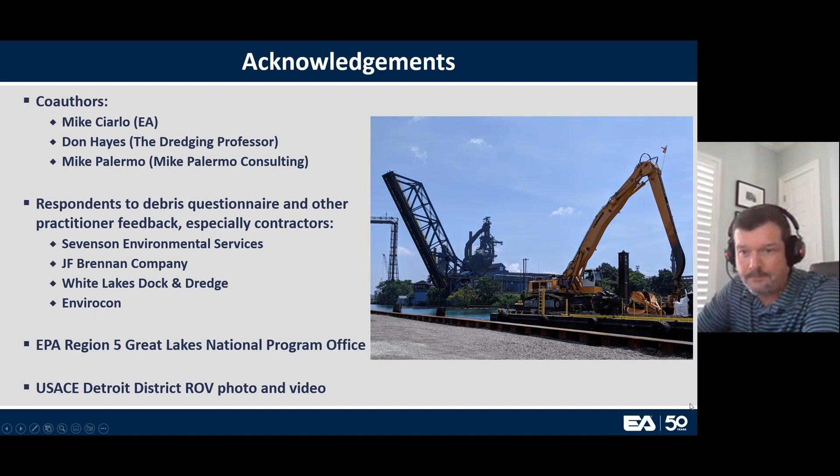So why is debris an important topic for environmental dredging or sediment remediation in general? We'll see in the next slide how important sediment disturbances are in the process of remediation, environmental dredging in particular, and debris can be an impact to that. Debris can also affect the operation side of dredging, resulting in additional project costs and extended construction schedule. It can be an important factor in the achievement of remedial action objectives in some cases, particularly if there are significant quantities of debris, and we'll speak to that in the upcoming slide. This is not just a consideration for dredging, it also impacts other remedial alternatives such as subaqueous capping. Next slide please.

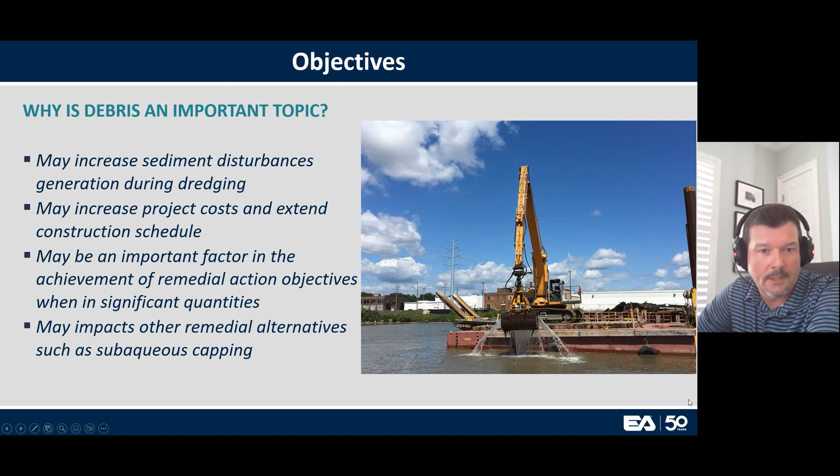Within the WEDA paper, we started by trying to compile and assemble all the information in the context of what do we know about debris for environmental dredging and what do we not know. That's in the context of published literature and guidance such as design guidance that both project planners and contractors who implement those projects have access to. One of the things we quickly realized is that we needed to step back and start almost from scratch, thinking about trying to find a common basis for stakeholders, the regulatory community, planners, and contractors to use the same terminology and have that same foundation in understanding of debris. A good place to start was a definition.

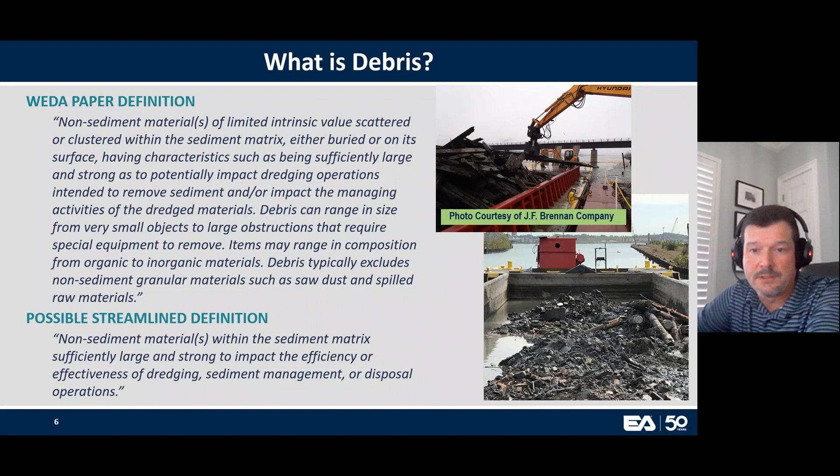So we proposed a definition in the WEDA paper. This one is very detailed, and I'll just present here the streamlined version, which is: debris is non-sediment materials within the sediment matrix sufficiently large and strong to impact the efficiency or effectiveness of dredging, sediment management, or disposal operations. Next slide please.

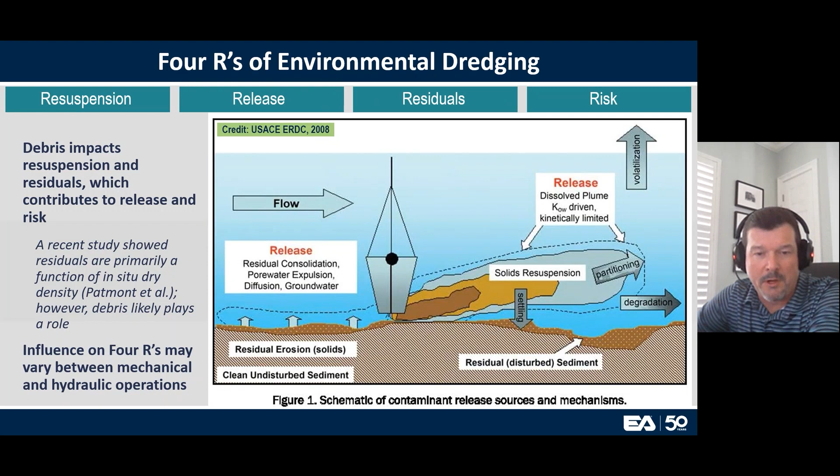And that ultimately combines and contributes to the environmental risk, the other R. But we don't see debris in this depiction, and we wanted to examine that more closely. Next slide, please.

So within the paper, we proposed a definition, as we saw. We tried to develop some planning tools to help with understanding debris, whether it's thinking about the feasibility study stage of a project where you're weighing one alternative versus another, or the actual design of the project.

We described some of the considerations that debris will have on the 4 R's for dredging that we just covered. Talked about debris impacts and some of the characteristics of debris that are important to try to better understand to plan the project.

We also provided, and in part from the input from contractors, a range of construction operations that can be employed for debris for both mechanical and hydraulic operations. Next slide, please.

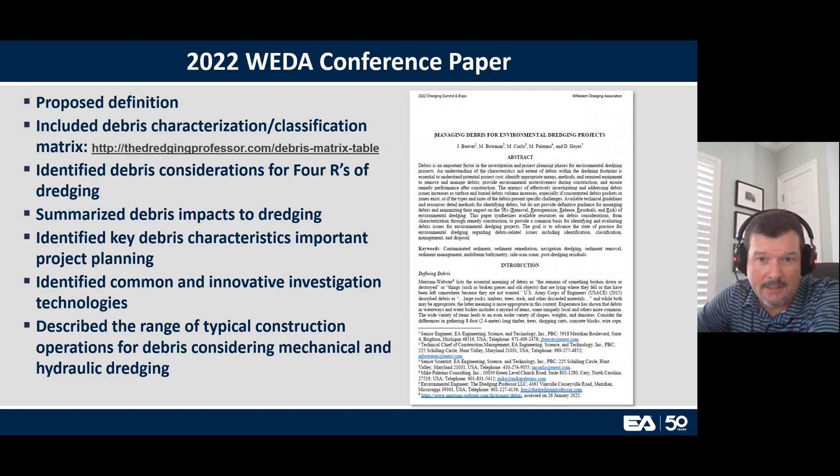So we're not the first to think about debris. Debris is covered in the literature and in guidance that is out there. It's just covered at a high level. That guidance does acknowledge the fact that debris is an important factor for both the environmental considerations for a project as well as the operational factors.

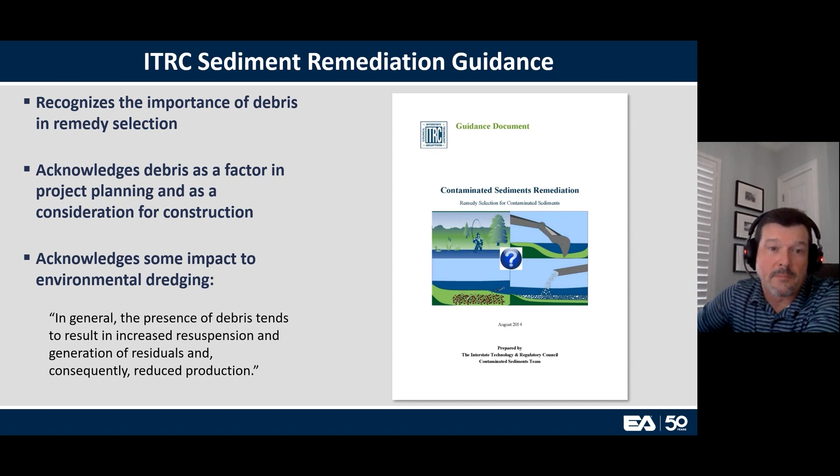And then as that bucket tries to dislodge and remove the sediment, it will pick up debris along the way. In doing so, that debris can contribute to the creation of voids, for example, that residuals can find their way within. It will obviously create additional disturbances of the sediment that contributes to the resuspension process, et cetera. And then as the debris is being lifted through the water column, sediment that's adhered to the debris itself in some cases, and then if the bucket is ajar and held open by a large piece of debris, then you can have losses entirely through the water column. That's something we need to think about.

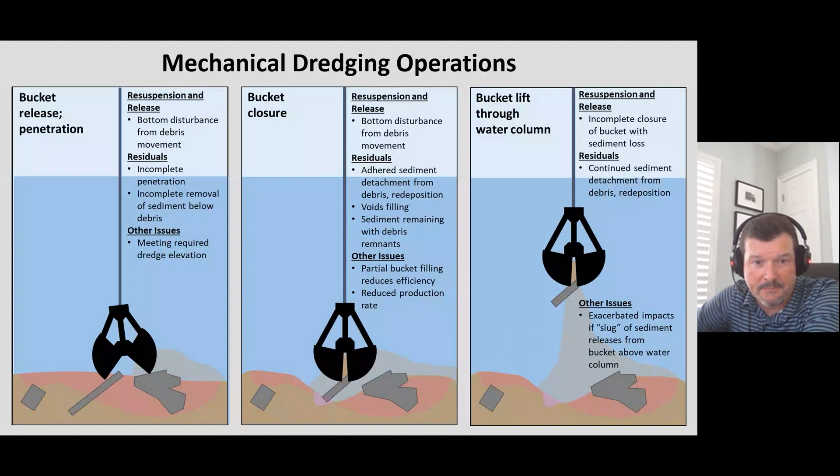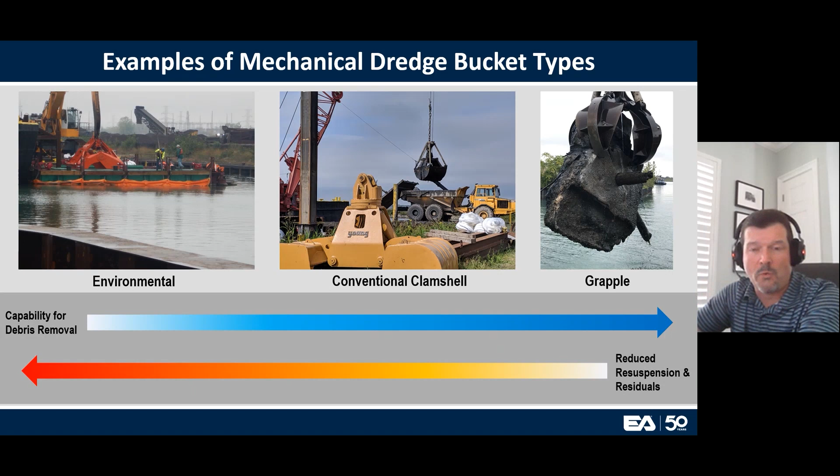And then we think also in terms of hydraulic dredging operations, which has some of the similar considerations for both environmental and operational impacts. In this case, though, the hydraulic dredge is essentially like a vacuum below water. There is typically a cutter that's dislodging sediment. In proximity to the cutter, below the ladder, is an intake to the pump and the pipeline. That intake is a very finite size, could be 8 inches or slightly larger.

There's only a certain amount of debris that could get through that. In fact, contractors may intentionally try to limit the debris that gets entrained in that process because of downstream processing that needs to take place. This type of operation, the dredge moves side to side, so it may kind of skip over or jump over debris, providing some additional disturbances.

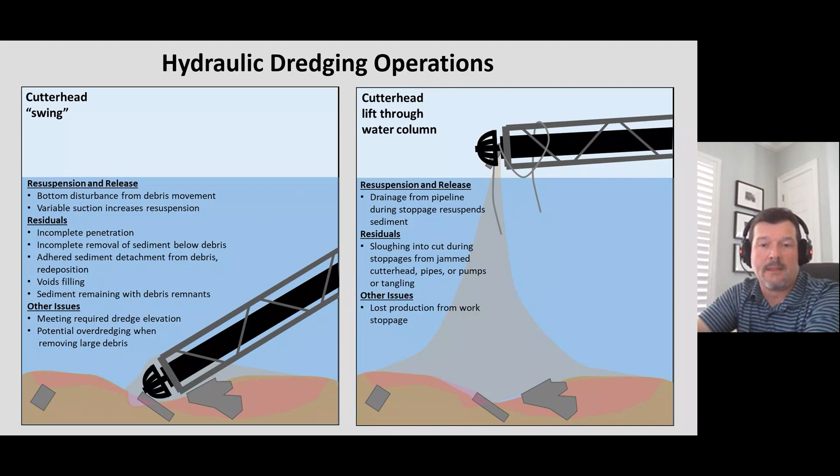Similarly, as with a bucket, these dredges need to come out of the water. So when you have to lift these up for maintenance or dislodging debris, that will also release sediment to the water column.

This is just a table that is in the paper, but it summarizes some of the factors we just went through. In the table, we tried to identify some of the more key considerations from those 4 R's that would be in play during those operations.

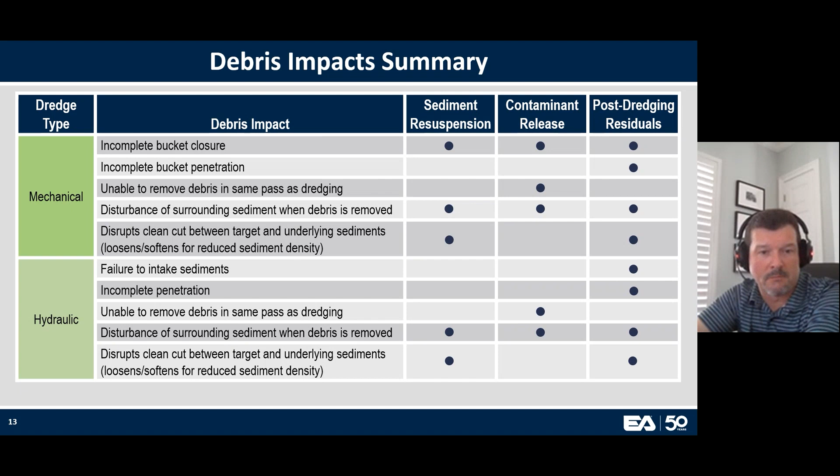We also wanted to think about categorizing our understanding, or the degree of uncertainty we have for a given site in regards to debris — unexpected debris versus expected debris. Unexpected debris would be something you think about for buried debris in the sediment subsurface, within the volume of sediment that has to be removed.

There are limited techniques available to us to really truly understand what buried debris looks like for a site. But our goal is generally to get as much of that unexpected debris into the expected debris category.

That can start with review of the operations for the site history. Even at the feasibility study level, a lot of effort can be put into trying to ascertain what the debris picture might look like for the site, and that can lend itself to improved planning for investigations, which we'll go through in subsequent slides.

We further divided expected debris into these other definitions, showing an increasing understanding of debris. If you anticipate the debris based on site history and anecdotal information, and start to understand the location of that debris, we call that identified debris. Then finally you reach a point where you have characterized the debris, which is the best position you can be in from the project planning phase moving into the construction phase.

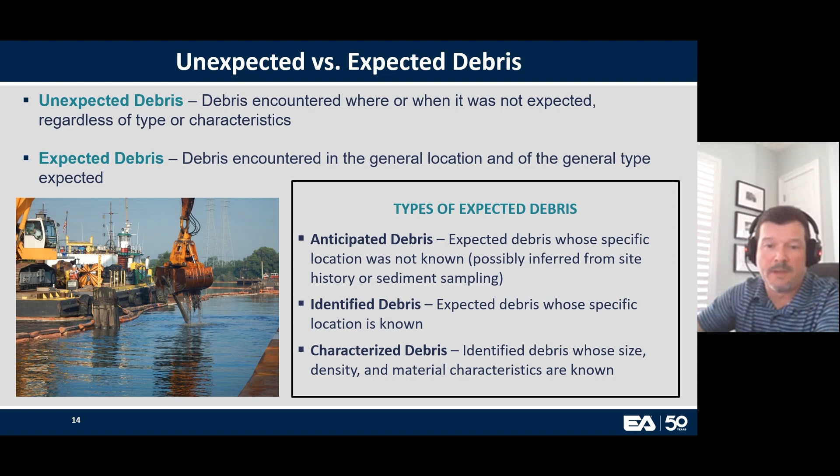So the key parameters we're looking for in a feasibility study or design are these items. We want to understand the types of debris present — if it's wood, metal, concrete — those each have different considerations and implications.

The size of that debris — smaller debris that can be easily contained within an environmental bucket or pass through the intake of a hydraulic dredge may or may not be even important in a sense. It's always important, but larger debris that may drive additional operations, may drive additional handling steps, may require specific disposal considerations, as well as other factors like the distribution of debris.

Is it localized within an area of the site that was active for an aspect of its history, or is it completely distributed throughout the sediment? And ultimately, can we reach a point where we can quantify that debris? As previously covered, the environmental factors are also key.

I wanted to point out that photo, from one of our projects. We were able to identify these cars — I'll show on an upcoming slide — using multi-beam bathymetry. As a result of being able to identify those debris items, we were able to, in the design, plan for a separate removal operation with this grapple.

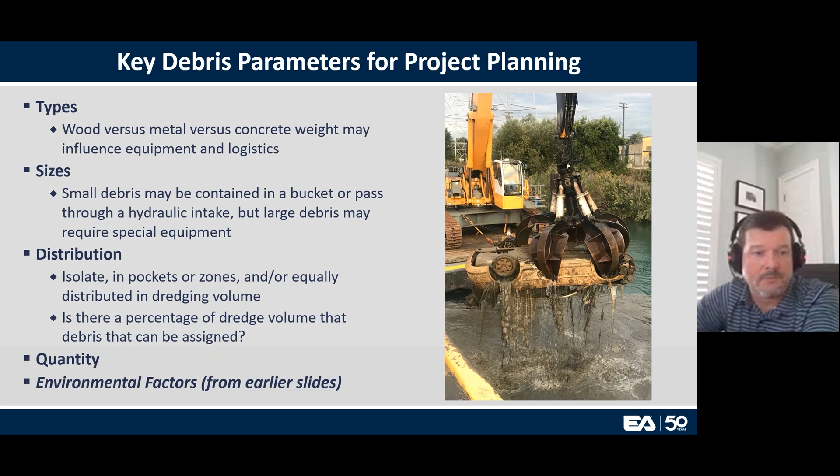If we think about drilling down even further to characterize debris, in the left-hand column there, we identified some parameters that we felt were important for that: unit weight, total weight, the embeddedness of debris, whether it's at the surface or, for example, maybe it's a log that's fully embedded through the entire thickness of removal. There are aspects of these characteristics that can drive problems ultimately, so we wanted to put a relative ranking.

On the embeddedness example, you would expect, for instance, that a log embedded fully through the thickness of removal will create additional resuspension and residuals above and beyond what you would expect for the sediment itself, and so on and so forth in the table.

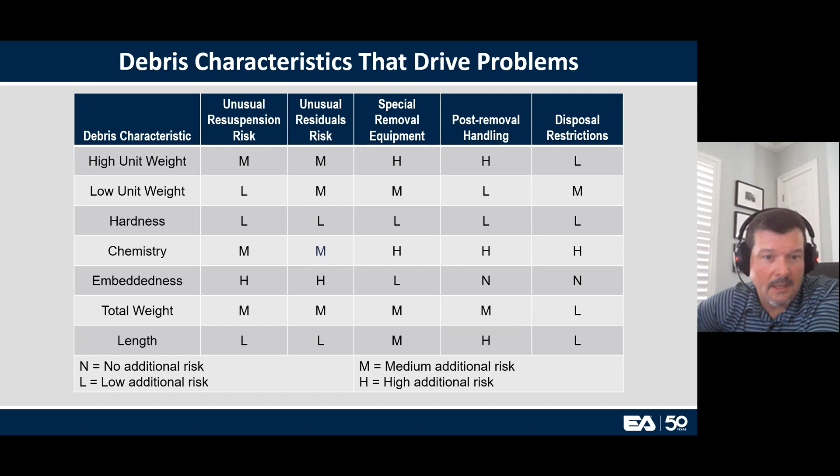This is another tool we developed for the paper. You can't see any of this, and that's okay. What we did is think about every piece of debris we could possibly think of and tried to place context to that. With a bullet, we did a yes/no on whether that particular debris might be important in terms of the debris characteristics that can drive problems, but also in terms of the entirety of the operations process, from dredging, dredge material management, transport and handling of sediment and debris as a combined volume, and ultimately the disposal. This is intended as a planning tool, and we included that in the paper.

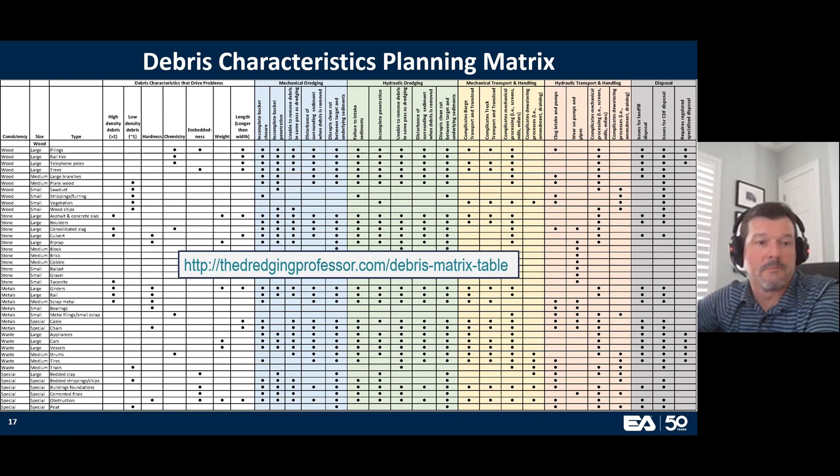Conceptually, one would expect that as our understanding of debris improves and we're able to characterize it and get some indication of the parameters that can drive problems, we can think about the project risks, plan the appropriate requirements, and include that in design specifications for both environmental protections and operational considerations.

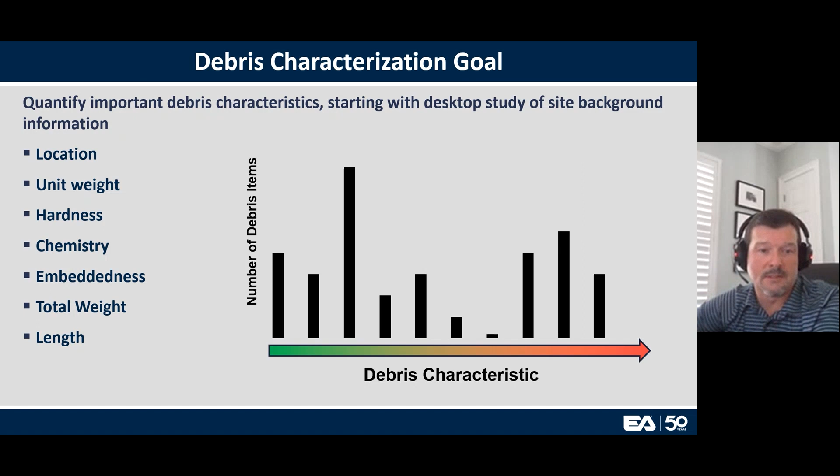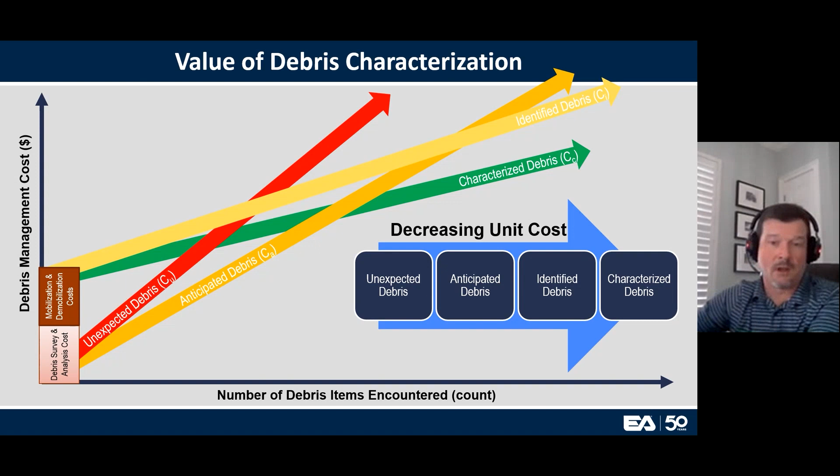Conceptually, as we increase our understanding of the debris, it can affect the outcome for project costs. If we go into a site where we don't have much knowledge of debris, or unexpected debris is significant and can't truly be characterized, one would expect that during construction, when the contractor encounters this difficult unexpected debris, costs would be on a pretty steep trajectory for each debris item encountered - that's the red arrow. But with some upfront investment in investigation activities, you may find yourself on a flatter trajectory where the cost per item is less, because both you and the contractor can account for that in executing the project.

This is an example from the previous slide - we saw the car. On the right-hand side is the data that ultimately led to the conclusion that those cars were there. In this case, it was as simple as multi-beam bathymetry, a data type that's very common for dredging projects and occurs very early in the project phase.

If conditions are right and you can choose between single beam or multi-beam hydrographic survey, a multi-beam that provides higher resolution could give benefits like this, where you're able to see the debris at the surface. Multi-beam bathymetry has been an effective tool for us, along with others listed here - this isn't a comprehensive list of investigation technologies. There's side scan sonar, and for a closer view of debris, technologies like remote operated vehicle, and even diving, which is fairly rare but can be employed. There are also technologies like magnetometer and sub-bottom profiling, but for understanding debris, those are difficult techniques to get good conclusions from, given their limitations.

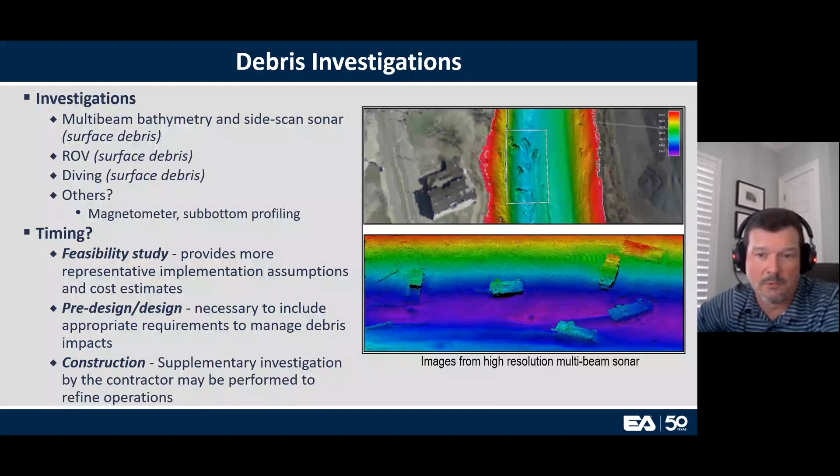This is an example of a side scan sonar mosaic from a project in a lake setting, about 150 to 200 acres. It's tough to see some features, but as you drill down and zoom in, unfortunately you start to see artifacts - those vertical lines are just the limits of the survey transect. But the resolution is so high that you can zoom in and see. In this case, we were looking for wood debris, and we were able to see clusters of debris in the surface texture that helped us understand this particular site better.

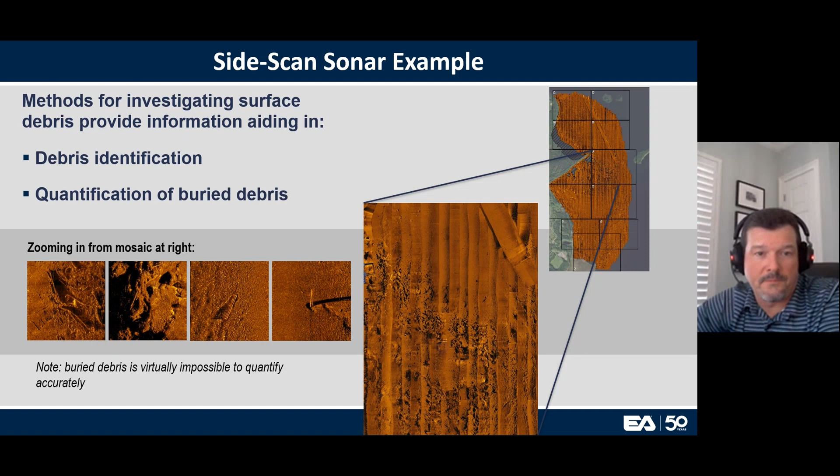This is a remote operated vehicle example.

In this case, we were wanting to get a better look at the debris expected in front of a wharf structure. This was in a fairly low visibility situation with the water, and yet the ROV can still pick up these large riprap sized stones on the sediment bed. We need to get to the sediment below that to remove it, which might lend itself to questioning whether an environmental bucket could even remove that, so maybe we need to bring a conventional bucket to the site to remove that material.

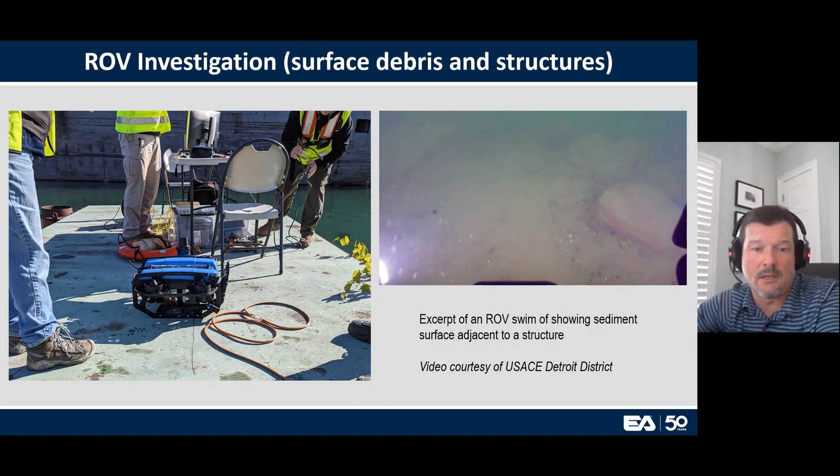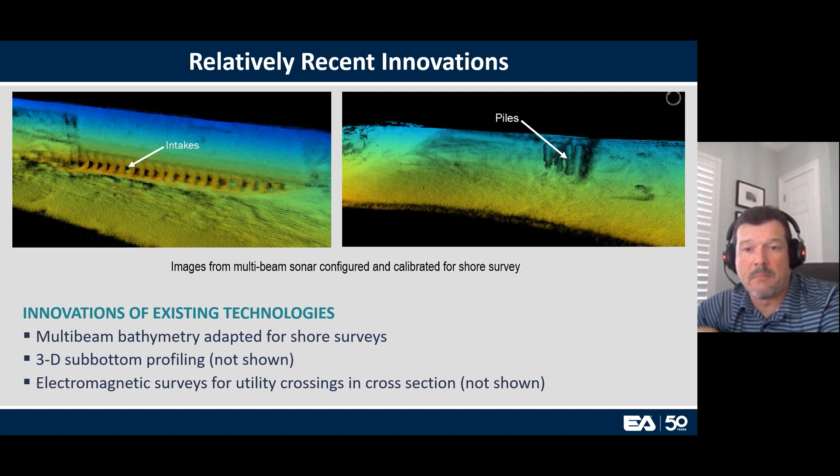This is an example from the acoustic sonar perspective. This is high resolution sonar, similar to a multi-beam survey, turned to its side to look at waterfront structures. In these examples, you can see intake structures and a small pier, which may help us zoom in to think about some of the debris that may be in and around those features.

With everything, there is an investment. For the most part, when the debris quantity is significant, or there is going to be complex debris or large debris that may require special operations and handling, it's very likely justified to invest in conducting investigations early in the project. But this is obviously a cost analysis that needs to be done. There is an investment needed. If the debris situation at a site is not anticipated to be problematic, then that may influence the amount of investment needed for effective planning.

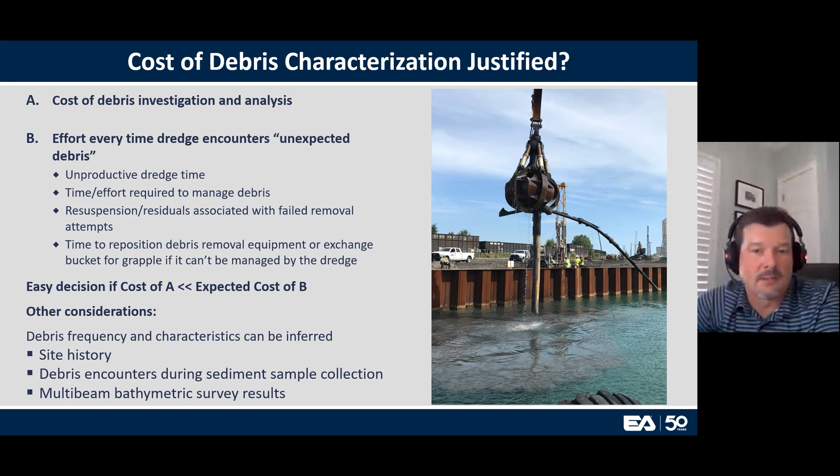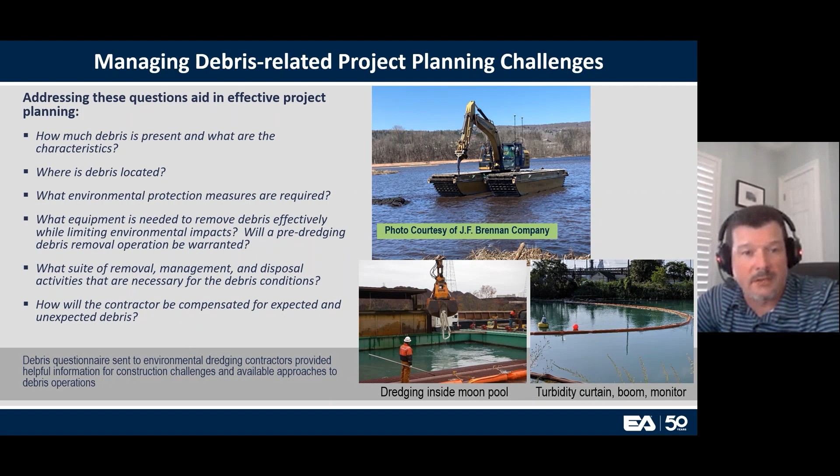To get additional insight, we sent a debris questionnaire to contractors, and we appreciated the feedback very much—it really helped us out. This next slide is a quick high-level summary of some of that feedback. I won't go through all of this, but focusing more on the right-hand side, I thought it was interesting that all the contractors said the same thing: more guidance is needed on debris. It's not just to give the contractor enough information to properly plan the project, but so that we're all speaking the same language and have a mutual understanding—whether it's environmental agencies, natural resource agencies, stakeholders, planners, or contractors—on how to refer to this debris and how to effectively plan so the contractor can be fairly compensated, and have enough information to plan important aspects, like whether the landfill will have special requirements for accepting the debris based on its size, composition, or other factors we discussed earlier.

So I think at this point, we turn it over to Matthew Bowman for his part.

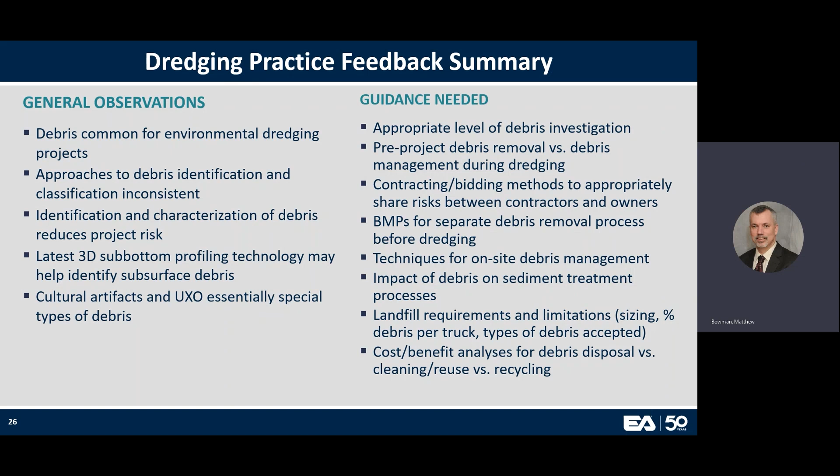Thanks, Jamie. I'm Matthew Bowman, EA's Chief of Construction Management, and I'm going to take the time we have left to talk about debris and its impact and management during remediation. I'd like to start by thanking the contractors that shared their knowledge and experience with us about debris management—it really helped the development of this paper and the slides. In particular, J.F. Brennan, Sevenson Environmental, Envirocon, and White Lake Dock and Dredge were all very helpful.

As Jamie alluded to earlier in the presentation, debris has a lot of impacts, and construction is no exception. Construction sequencing could be changed in terms of having a pre-dredge debris removal event. It could also impact the kind of dredging you do, whether hydraulic or mechanical—we'll talk a bit more about that later. It may require special equipment or attachments, such as skeleton buckets or grapples, to address the debris at your site. There's certainly a production rate impact at sites with high hits for debris materials, and it can cause increased downtime and equipment maintenance, particularly for hydraulic dredging, whose nemesis is typically steel cable and wire sometimes found in industrial waterways.

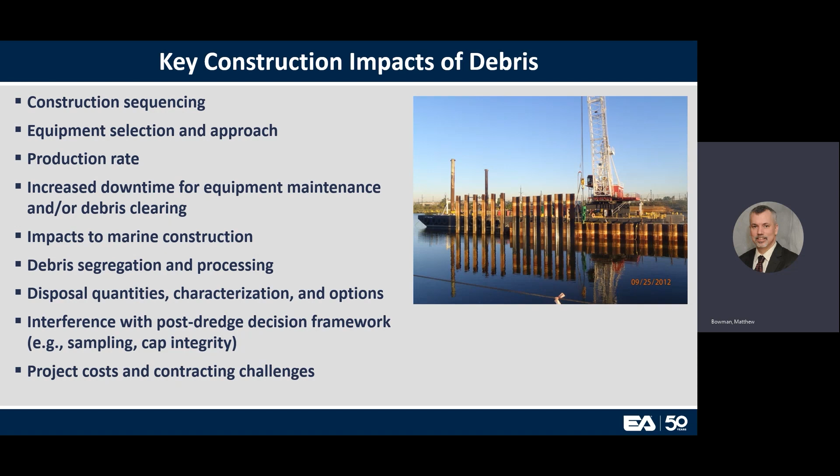So, contractors have a lot of different approaches that they can use to address debris issues, and it really differs in some ways based on the kind of dredging that they're doing, mechanical versus hydraulic.

Mechanical has the advantage that it has a little greater capability of actually working in and around debris. Depending on the buckets that they use, whether that's a clamshell or an environmental bucket, they do have the capability of removing some debris as a part of the dredging matrix, and even using that same bucket to pick specific objects out so that they can be managed.

That's not to say there still isn't sometimes a pre-removal event that occurs for surface and embedded debris. They also sometimes switch to specialized attachments, like grapples and rakes, and even a skeleton bucket, to try to go after cobbled material.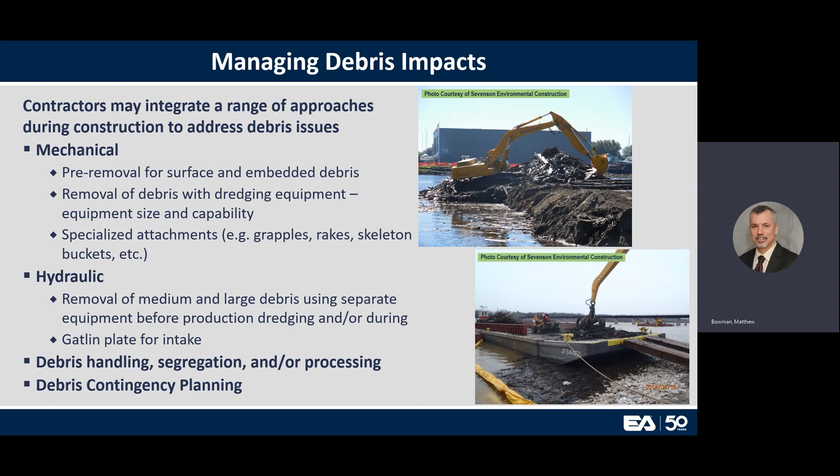So on the topic of pre-dredge debris removal considerations, I just have a little bit of information here about the basis for that decision and some of the planning considerations that you would want to make if you're going to pursue that type of operation.

As I mentioned already, hydraulic versus mechanical dredging approach. Hydraulic needs a pre-dredge debris removal event more commonly than mechanical, due to mechanical's innate capability of sometimes dealing with smaller or small-medium sized debris.

Accessibility, the quantity, the distribution, and the size of the debris will really dictate the type of equipment that will be used for this kind of activity. Using the terminology from the presentation already, identified and characterized debris—those we've located and understand what they are—are really the only types of debris that can be efficiently mined using this particular approach.

Oversized debris, like the cool picture that Jamie showed of the car getting picked out of the Lower Rouge River, those are perfect targets for this type of operation, because none of the standard dredging equipment will be capable of dealing with those, and certainly they're large enough obstructions that would make dredging around them very difficult.

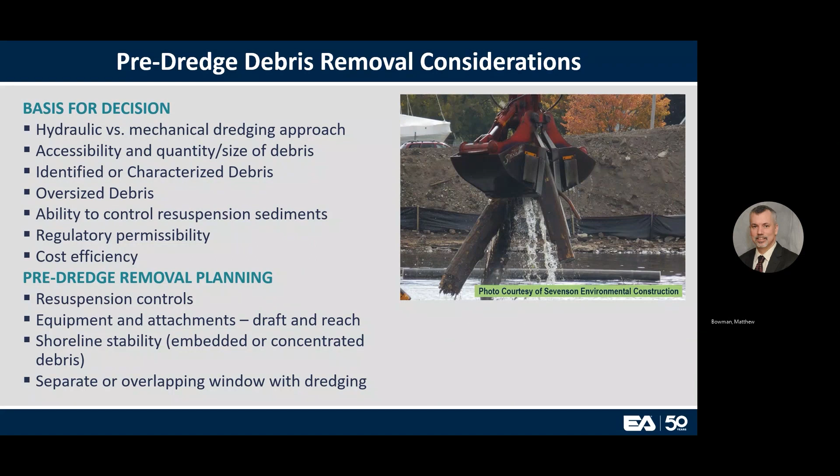So some of the 4R considerations here: when you pull these objects out of the water, obviously there is going to be resuspension of sediments. There could be sheening or releases of NAPL that occur from embedded objects, as well as the process itself of picking these items, transporting them, and processing these debris materials will generate water too that will have to be managed and potentially treated and disposed of.

Turbidity barriers and sorbent booms are pretty common tools used to protect water quality in the areas where debris removal is occurring. In some cases, some projects have more robust features like cofferdams, combination walls, and steel sheet pile walls that are employed as containment barriers for the project, which certainly should be factored into the timing of when debris removal occurs.

Moon pools are just another configuration of turbidity barriers that could be used on a project. And water generated in the scows or for temporary storage on deck barges often needs to be contained. The question obviously is a regulatory one and a permitting one, but simply blocking the scuppers on the barge and then managing and controlling that water inside the barge periodically may be necessary.

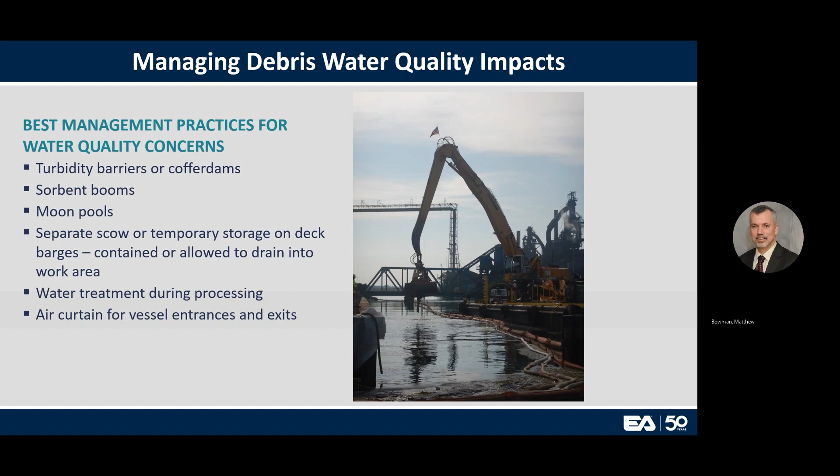So, debris risk management. I think Jamie said it very well. This data that we want to gather on debris, whenever it's practical and whenever it's cost effective, getting that data early on is really important to the project because it will create a more informed design and a better prepared contractor to tackle the debris challenges of your site.

One of the common themes that came out of the contractors we interviewed, almost universally, is this idea of risk sharing. In a lot of cases, debris management tends to be a lump sum item and basically a contractor risk that they are required to manage based on assignment in the contract. And that can be pretty challenging to estimate and pretty challenging to prepare for.

Perhaps contingency line items in a bid, maybe unit costs for managing debris, or even, on one site we had, a time and materials price for the equipment standby, so that it's prepared to deal with debris as it's found, and then a unit cost when it's actually operating.

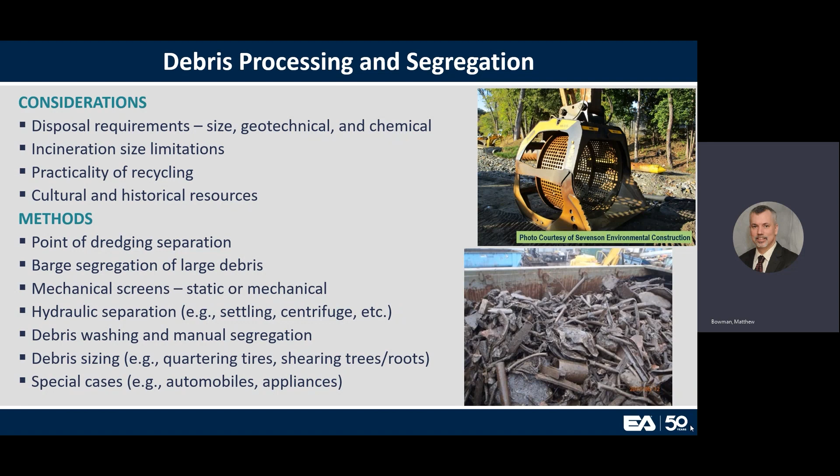These options aren't too much different than what you'd find with contaminated sediments. The first two, the primary considerations, are mostly geotechnical - are you doing a good job with this material avoiding voids and avoiding differential settlement in these structures? Those are the common considerations that drive being able to put debris in those locations.

Metal recycling, we touched on that - certainly a possibility. I haven't seen a lot of that in my experience, but I'm sure it's been done. And beneficial reuse - certainly a green thing to do when it's possible and when it can be done safely. Next slide, please.

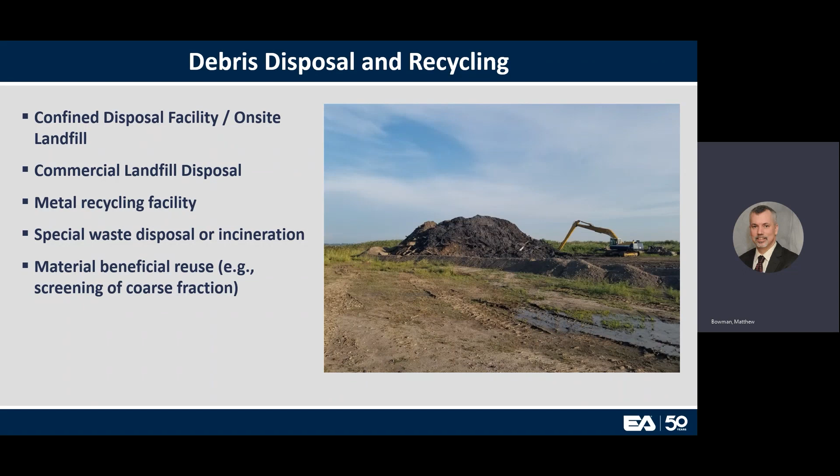So the team just wanted to wrap up with some quick closing thoughts.

Debris - these first two are kind of connected. Debris really requires early attention in the project, particularly in the investigation, as well as the remedy and construction phases. I think you'll get a better remedy design, better construction planning, and better construction execution the more you know about the debris at your site.

Buried debris investigation is an opportunity for innovation in our industry. Finding subsurface targets that are non-metallic is very difficult. Hopefully new technologies come online to help us look deeper into the sediments and understand the things that are waiting for us once dredging begins.

Collecting site-specific data for the 4Rs for debris - there isn't a lot of literature material on that, and it would be great if there were more of that to help regulators, owners, and engineers understand better what the 4R impacts are when we remove debris.

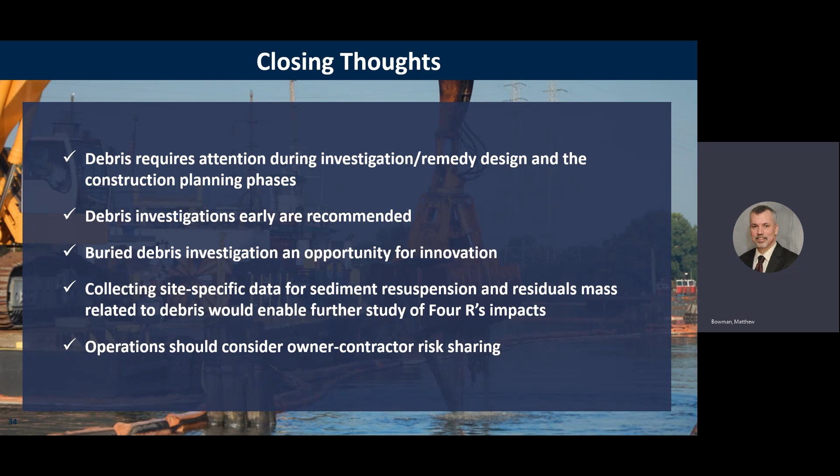And finally, I would encourage everyone to consider more risk sharing when it comes to the management of debris. I think there are benefits for all parties, and I think it will ultimately reduce cost and better manage risk.

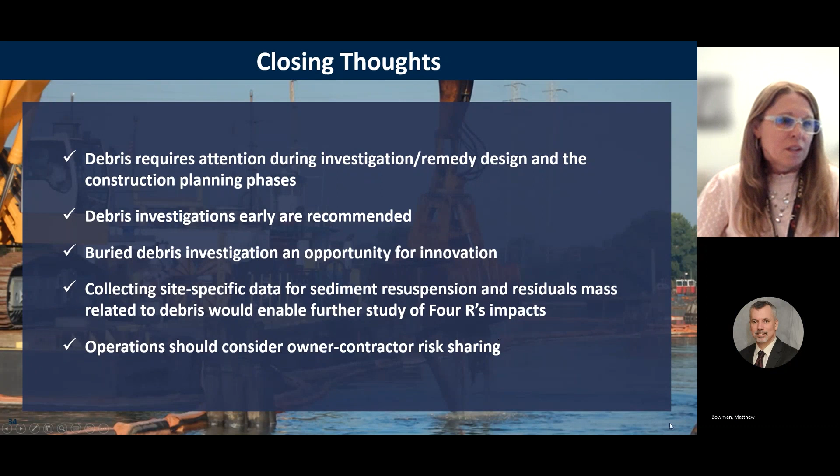I don't see any questions yet, so I'll prompt you both with one while we're waiting. What has been the most significant dredging debris challenge that either of you have encountered to date?

Do you want to start, Matt? Probably would be one at a site in New Jersey where an enormous pocket of debris was located well below the subsurface along an existing bulkhead structure. Those particular sediments were located in a hazardous disposal classification and required substantial planning and rework of our debris processing approaches to make sure we managed those materials correctly. It was a big surprise to us - we knew there were going to be some hits, but I don't think we imagined quite the amount we found at that site.

And I would say, for that one - actually a project that some of the photos from this presentation were from, including that big car - there are instances like that particular project where we really think we have a good handle on what's out there from all the work leading up to design and throughout the design, and have thought not only about the types of debris, their characteristics and quantities, but also provided a means to compensate the contractor fairly and share risk, as Matt was mentioning. But even in those instances, in this particular project, there was more debris in the unexpected category than everyone anticipated, and it really added to the complexities of that project.